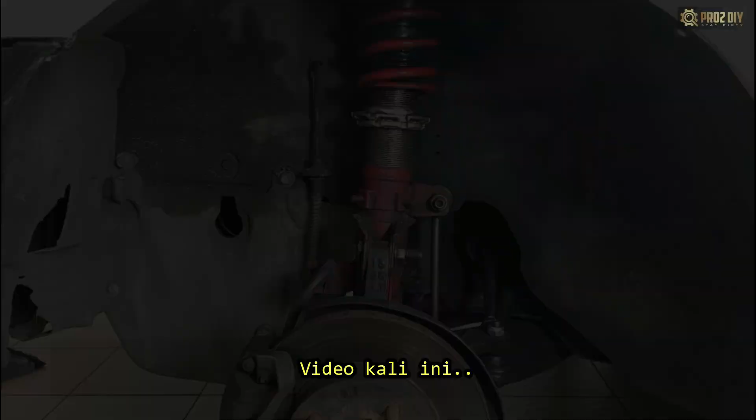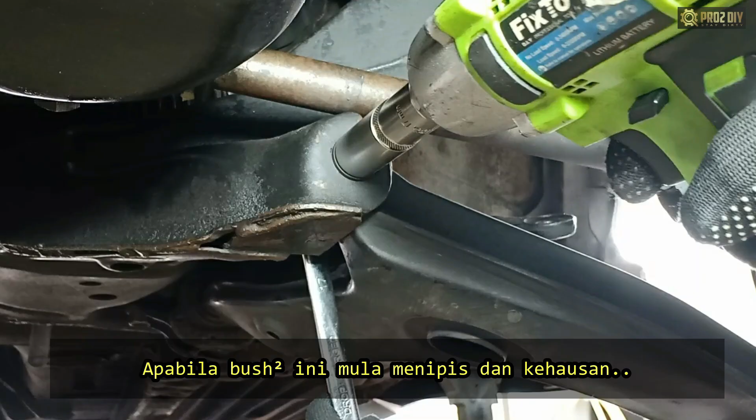In this video, I will share with you guys how to restore and rebuild the suspension system on your car. Almost every bushing on the front wheel is going to be replaced. The reason why we are doing this is because all these components are worn out and they have to be replaced. Once the bushings start to wear, it results in metal-to-metal contact, causing greater damage to these metal parts.

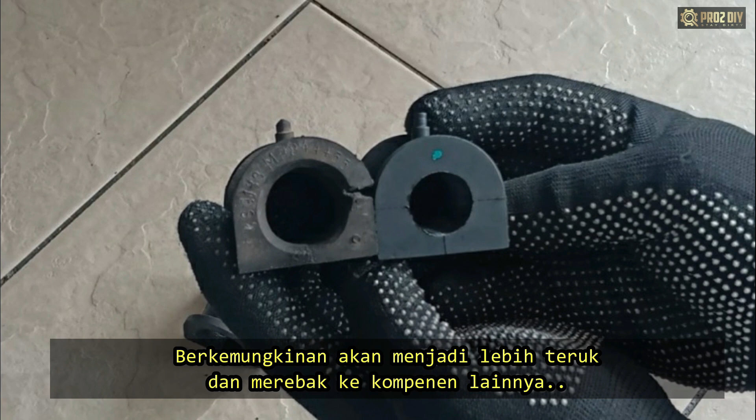Not only is this a relatively inexpensive repair, but replacing them will help ensure that your vehicle is safe to drive. Additionally, if you ignore the damage, there is a chance that it will get worse and lead to further damage. Remember, it's best to get the problem solved as early as possible, in order to avoid more serious conflicts in the future.

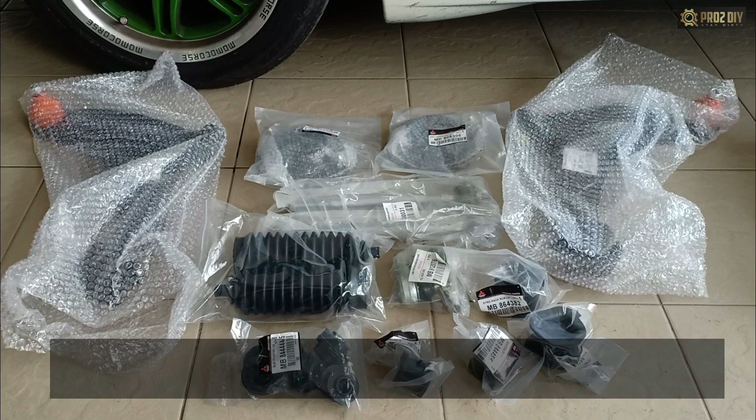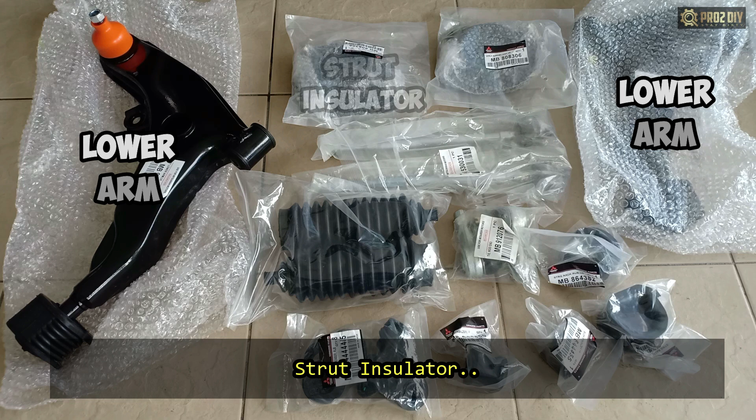To give you an idea of what we'll be doing, here are the old components that I have removed and will be replaced with the new ones. Generally, everything from the wheel inwards is gonna get replaced. Here are all the new components that will be installed on this car.

We will be replacing the lower arm, the strut insulator, also known as the absorber mounting, inner tie rod, and outer tie rod end, along with a new boot cover to protect them. A pair of rubber bushes for the steering rack. A set of cross-member bushings and a set of front stabilizer bushings.

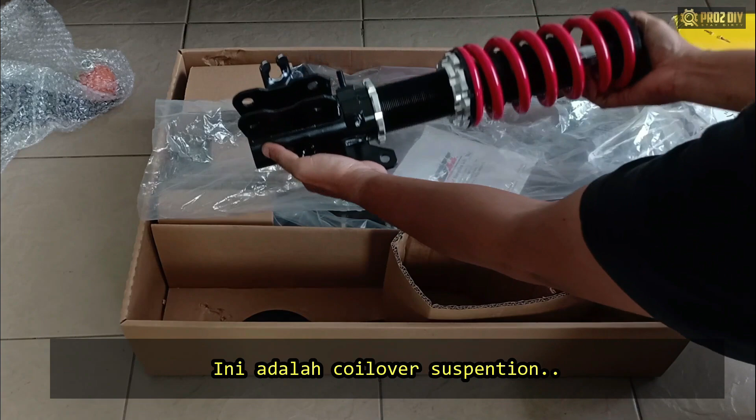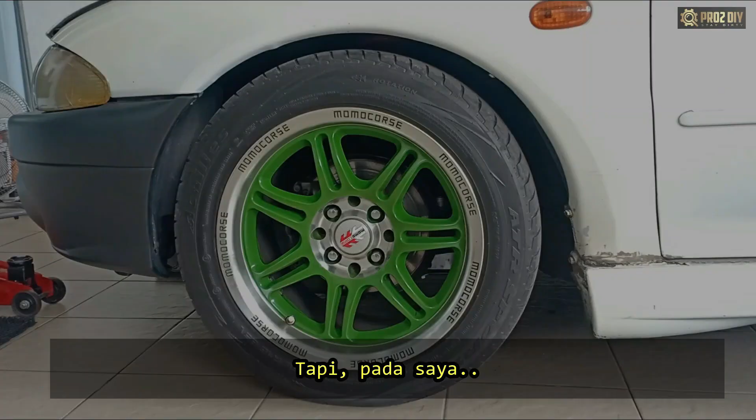I will also replace the suspension for this car with a new one. This is coilover suspension, a type of suspension that allows you to adjust a car's ride height. Some people call it a high-low body shift adjustable absorber. While coilovers are better known for their height adjusting capabilities, people usually think they make the ride less comfortable. However, if you install the coilovers properly, you'll actually get better handling.

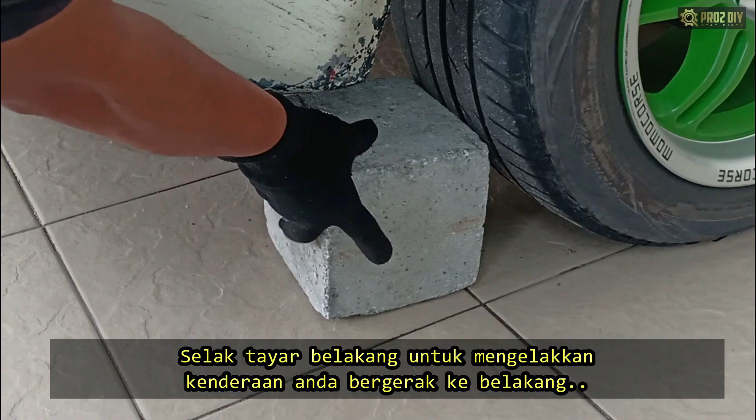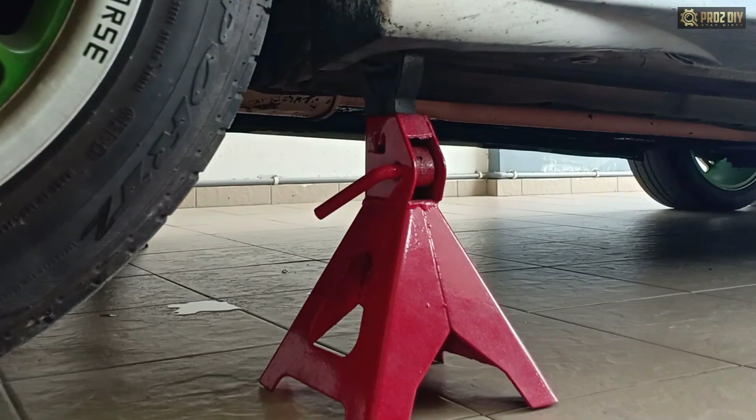So, we're ready to get started and install our new suspension. Before you jack the vehicle up, block off the rear tire so the car doesn't roll. And also pull the emergency brake, which will prevent the car from rolling. Use the hydraulic floor jack for the safest way to lift your vehicle. Slide the floor jack underneath your vehicle, right at your jacking points.

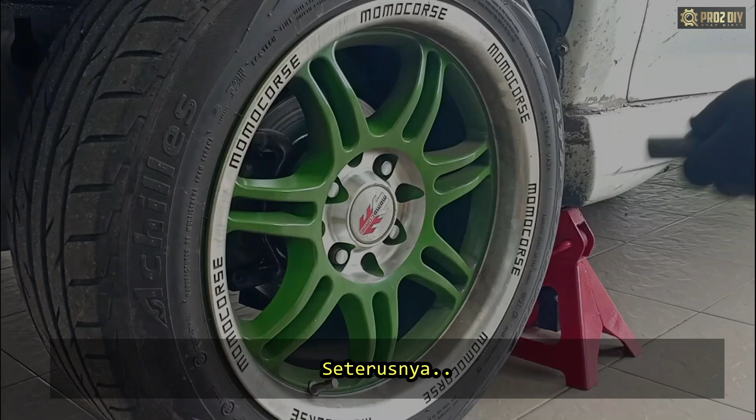Once the car is jacked up, you can get your jack stands and place them under the car. Then, you're going to slowly lower the car down onto the jack stands. Before you begin working under the car, wiggle the vehicle left and right to ensure it is stable and secure on the jack stands. Wiggling the vehicle also tells you whether you have the wheels blocked properly.

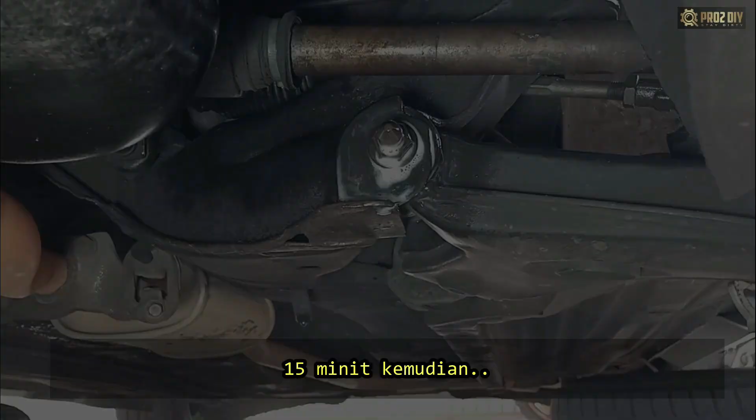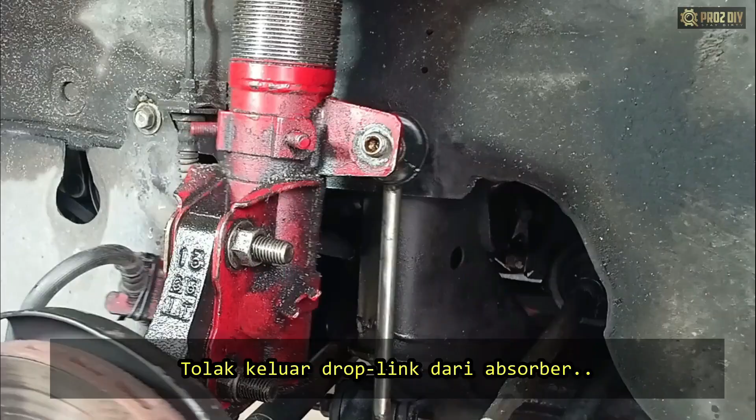Once you've done that, unscrew the lug nuts that hold the tire in place and take the tire off. For extra safety, place the tire under your vehicle. As the bolts and nuts will most likely be covered in rust under here, I will put some lubricant on them to try and help release them. You might find it best to leave them to soak for 10 to 15 minutes before starting.

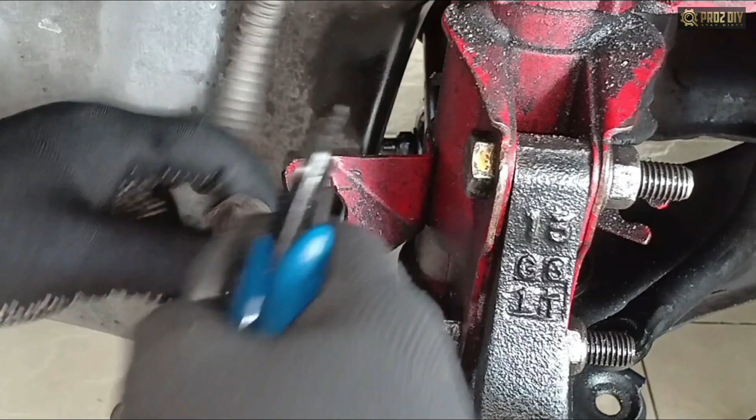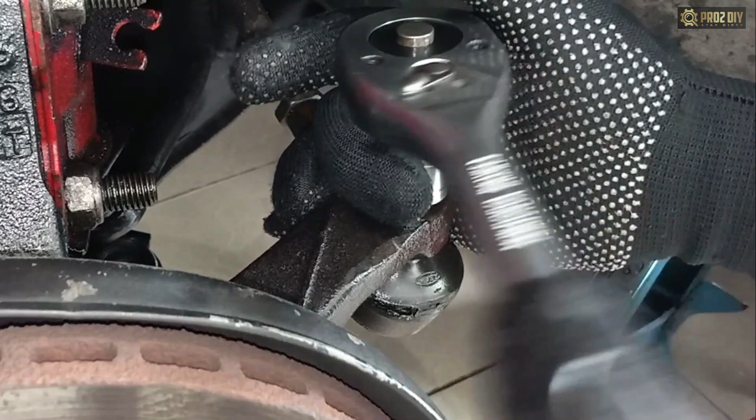After 15 minutes, start by removing the upper 17mm bolt from the drop link. Take a car jack, and jack up the knuckle to get the drop link aligned with the ARB hole. Push the drop link away from the absorber. Remove one more 14mm bolt, located below it. And then remove the drop link. Cut the cable tie to release the brake hose from the absorber.

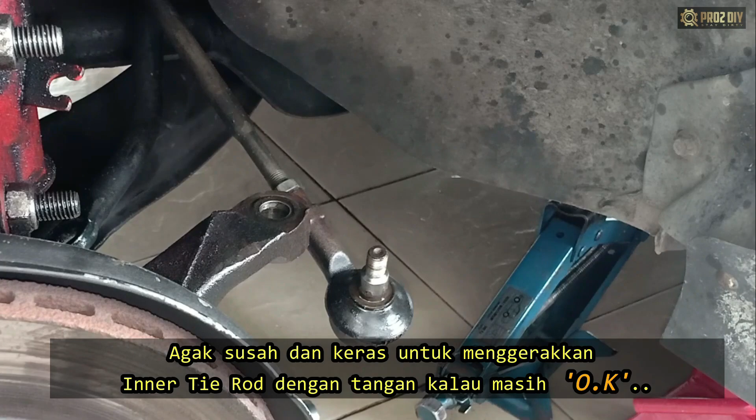Next, we will remove the tie rod end. Use a 17mm socket to loosen the nut above it. To remove the tie rod end, you can use a ball joint separator. Slide the fork of the separator between the ball joint and the part you want to separate it from, and position the top of the jaw at the center of the tip. Sometimes the tie rod end can get stuck to the knuckle. This special tool can help make it easier to separate them.

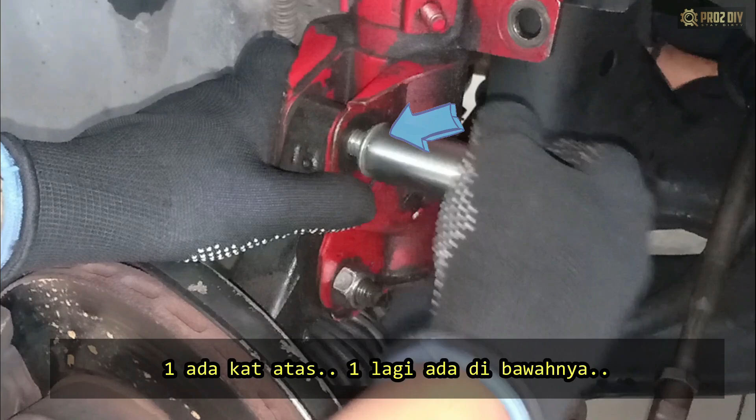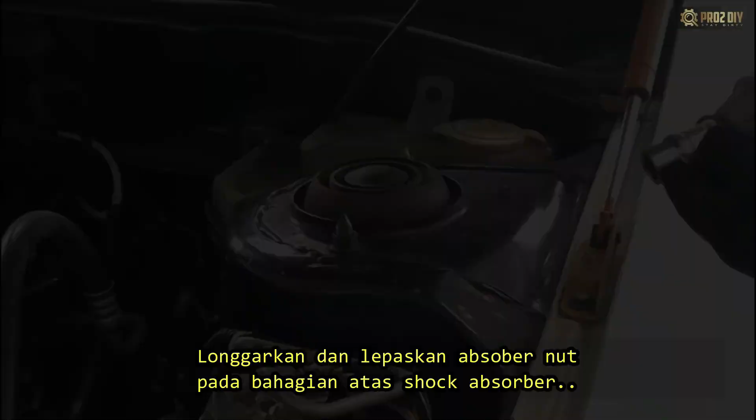Next, we are going to take out the shock absorber. First, we need to loosen the two bolts, one at the top and one at the bottom. Use a hammer to push them out from the shock clevis. Remove the upper bolt, then insert a screwdriver into the hole. This will hold the shock absorber in place for the moment. Then remove the lower bolt.

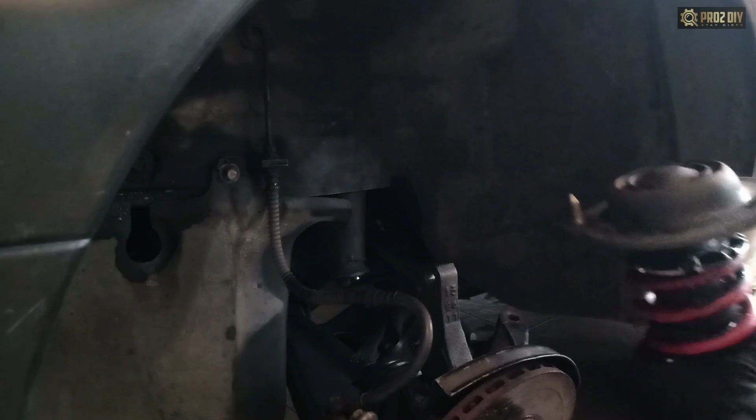Loosen and remove the top shock absorber nut. 14 millimeters. Remove the screwdriver. Pull outward the knuckle, and you can take the shock absorber completely off the car. This shock is having issues with oil leaking out. You can see that the shock looks wet and oily.

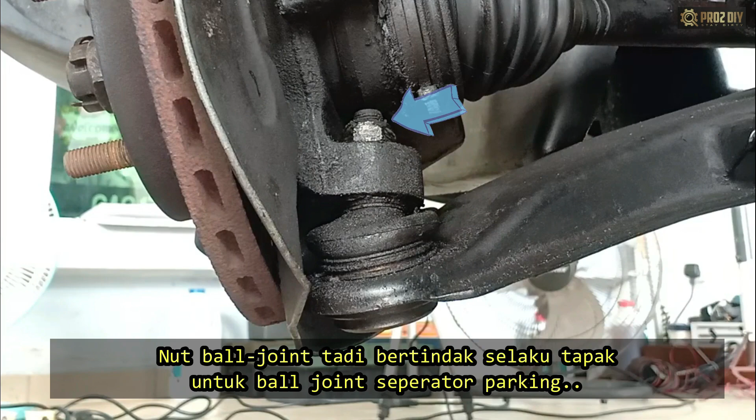Before we continue, I would hang my knuckles from the vehicle with a wire. Lift the knuckle using a scissor jack and insert the wire to hang the knuckle. This prevents the knuckle from putting pressure on the brake hose or the drive shaft.

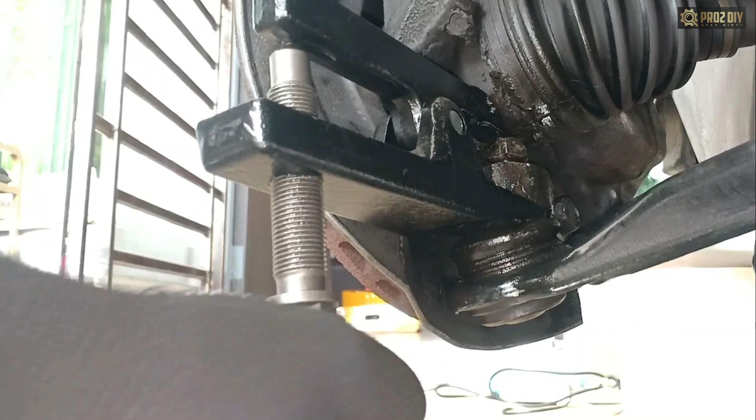Next, we are going to take out the lower arm. We need to turn the knuckle outward to create some room. Then, we will loosen the 19mm nut on the ball joint. Only loosen the nut, do not remove it from the ball joint. The nut protects the end of the thread when using the ball joint separator.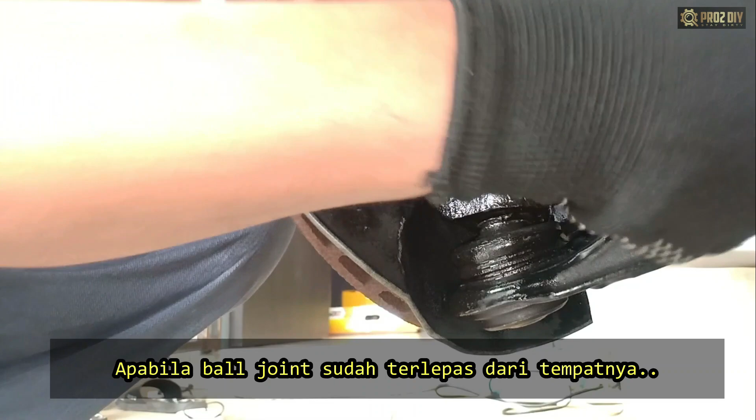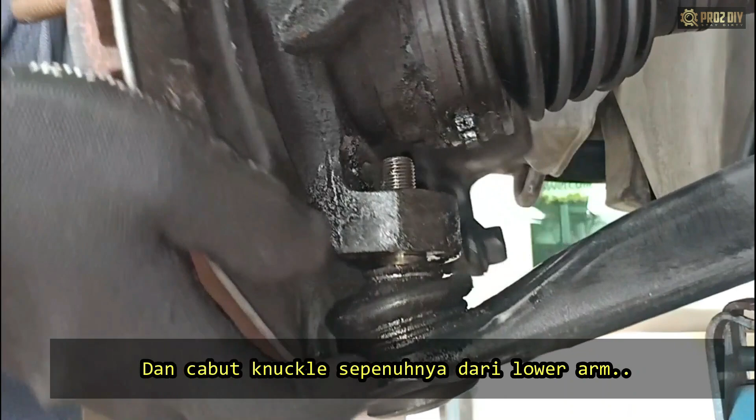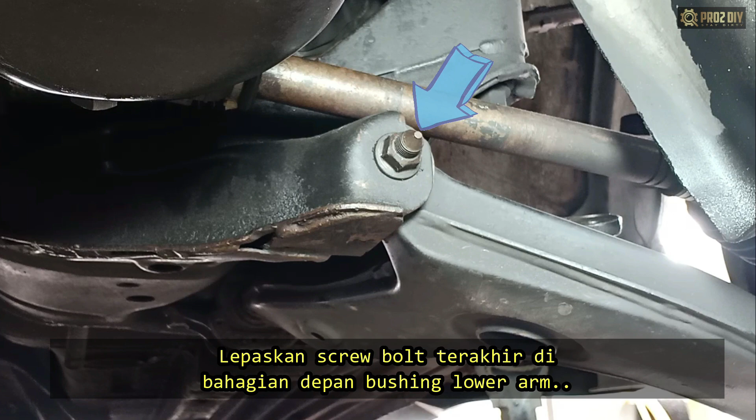Slide the fork of the separator between the ball joint and the knuckle. Using a 14mm socket, tighten the bolt of the ball joint separator until the ball joint breaks free. Or, you can use a hammer to hit the joint, which will make the ball joint come loose. Now with the ball joint broken loose, continue removing the 19mm nut. And remove the knuckle assembly from the lower arm.

It's obvious that the dust cover of the lower arm is broken. Moisture and dirt will enter the joint, resulting in premature wear. Clearly, when I push the ball joint with my hand, it can move easily.

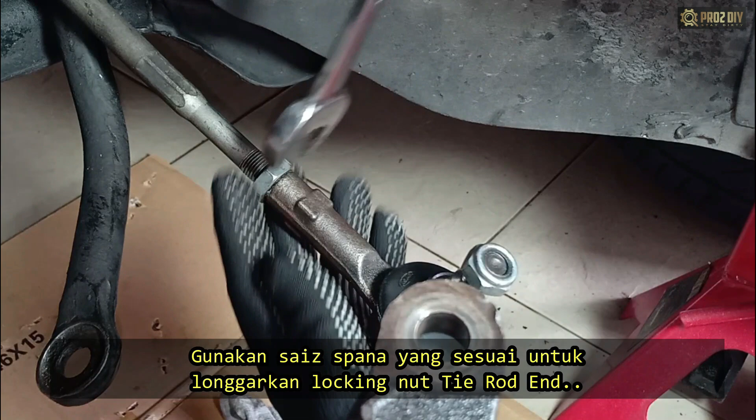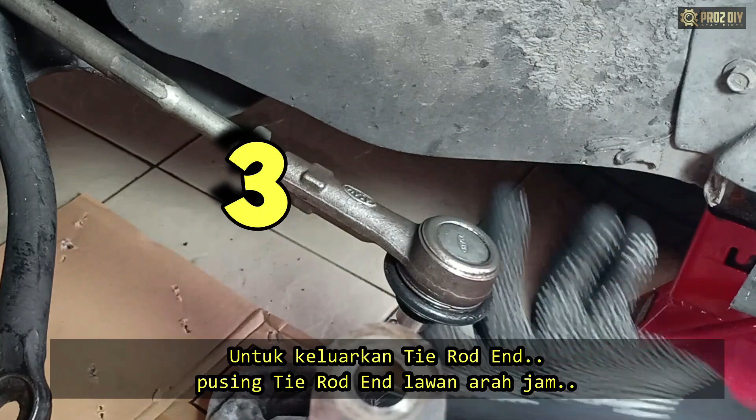Next, remove the lower arm support bracket by unscrewing the two screw bolts. 17mm. Remove the last screw bolt from the front bushing. Use a 17mm ratchet to hold one end of the screw bolt, and then unscrew the 17mm nut on the other side. Remove the screw bolts from the assembly, and the lower arm can be removed completely from the vehicle.

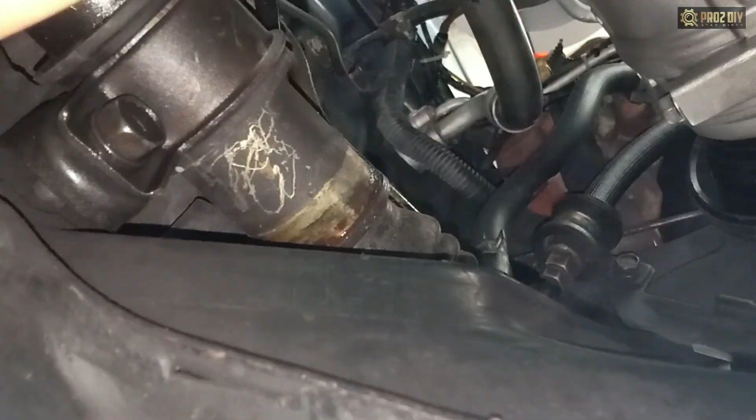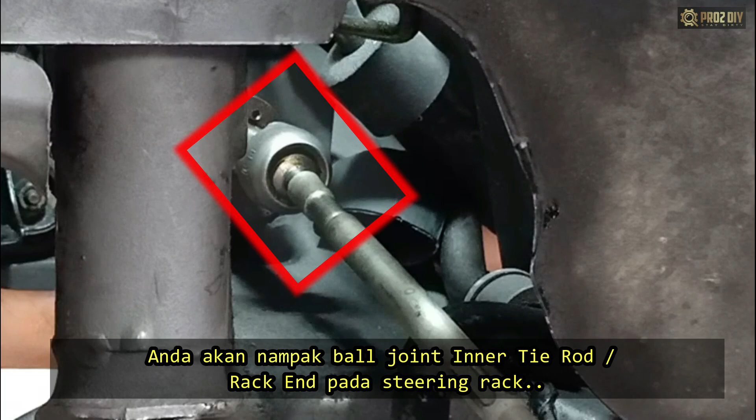The next item to be removed is the inner and outer tie rod end. There should be a locking nut sitting tight against the tie rod end. Use a properly sized ratchet to loosen the locking nut. Mine was 19mm. The outer tie rod end must be twisted off from the inner tie rod.

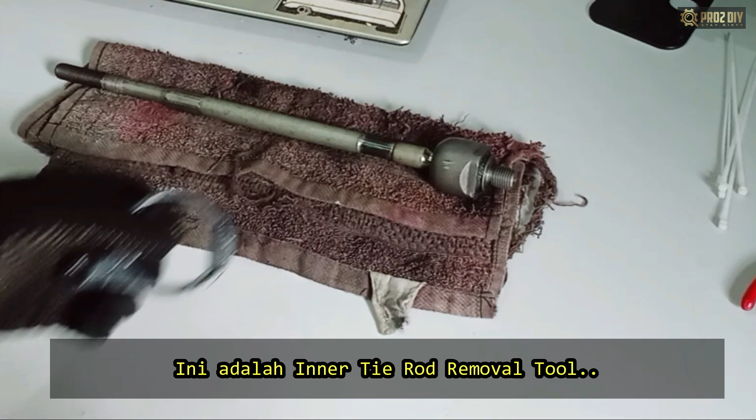Remember to count exactly how many turns it takes, so that you can tighten the replacement the same number of turns. This helps keep your alignment as close as possible. However, you will need to have an alignment done after replacing the inner and outer tie rod end.

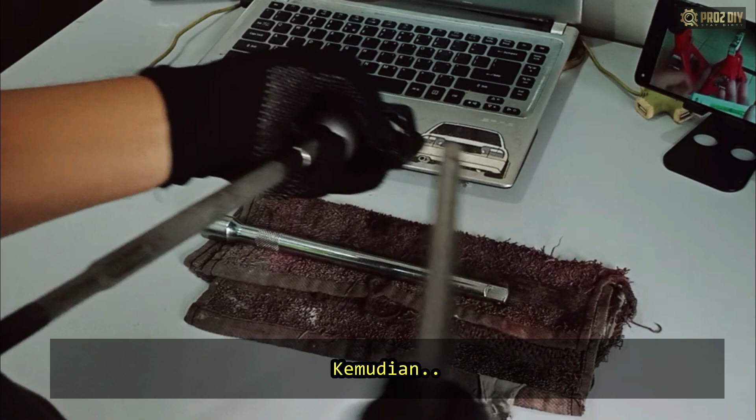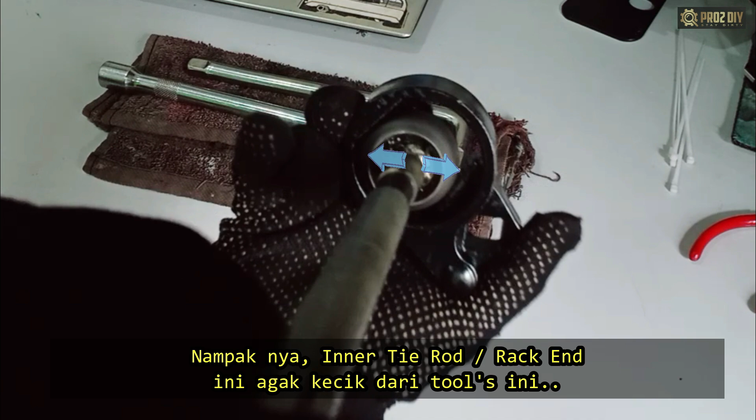Next, take a cutter and cut the cable tie from the boot on the inside end of the inner tie rod. There is another one at the very end of the boot that you need to remove. Now, you can slide the boot off. Once you remove the boot, you will be able to see the ball joint of the inner tie rod where it is screwed into the rack.

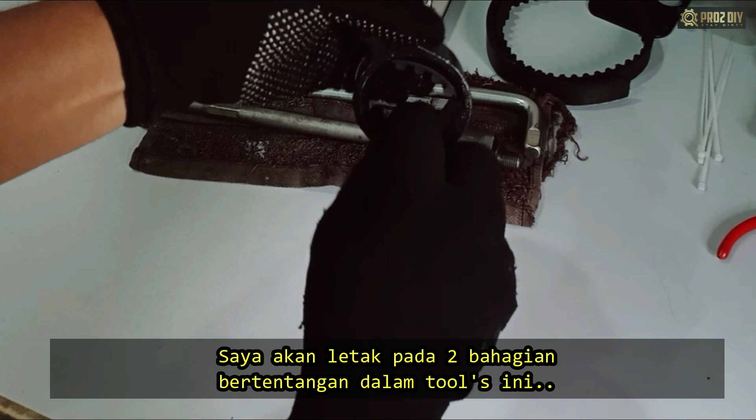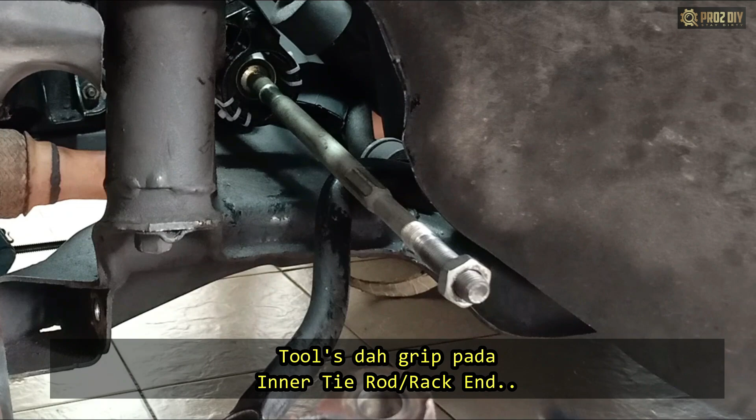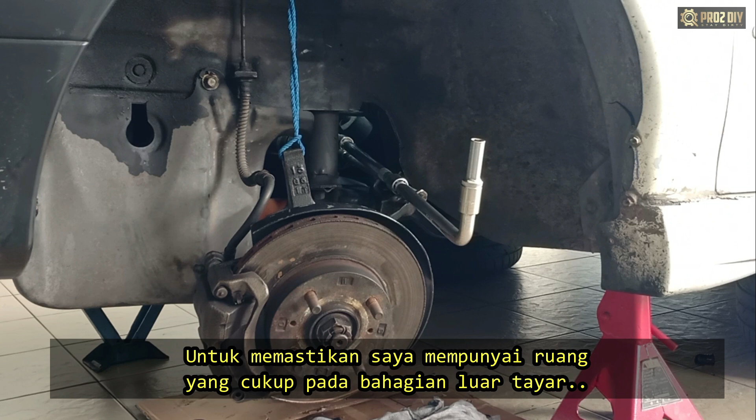To remove the inner tie rod, you will need a special tool. This is an inner tie rod removal tool. How to use it? You can just slide it over the end of the inner tie rod. The head was designed to auto-grip the end of the inner tie rod when it meets a flat surface on the inner tie rod. Then, put a long extension on there with a breaker bar. Twist it anti-clockwise, and it comes right off.

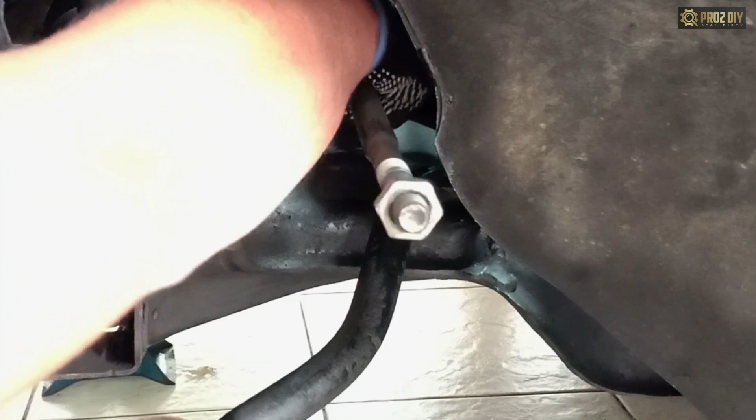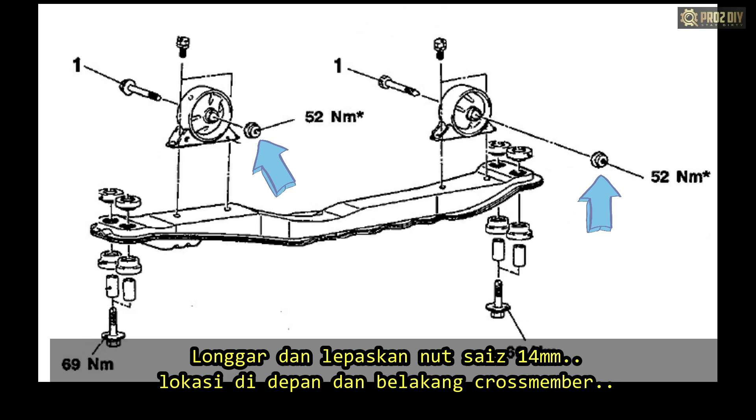But it seems the inner tie rods are smaller in diameter and the tool won't grip the tie rod very well. So, I made a few adjustments to it. Using my old timing belt, I cut 2 small pieces and placed them on opposite sides of the tool. Then, I use some cable ties to secure them.

Alright. Let's see how well these work. Begin by sliding the tool over the end of the inner tie rod. Give it a push left and right a couple of times. That will make sure it's firmly gripped around the end of the inner tie rod.

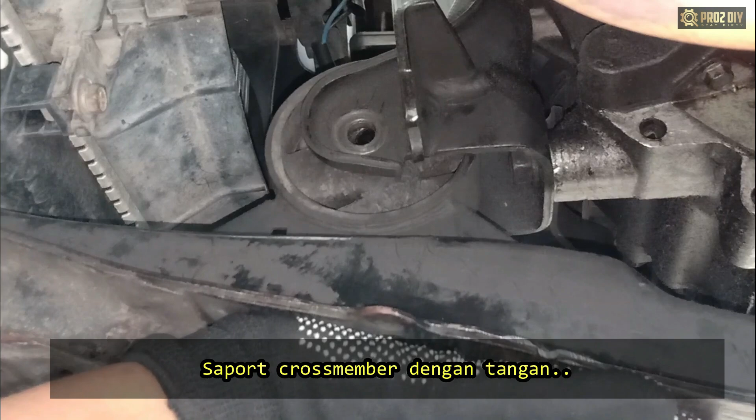Once that is secure, attach a long extension to the socket drive. I used 3 long extensions in a row, so I could have enough room outside the wheel well area. At the end of the extension, I used a long pipe to break the inner tie rod loose. Then, twist the inner tie rod end counterclockwise to loosen it from the rack. Once it is loose, you can take the rest off by hand.

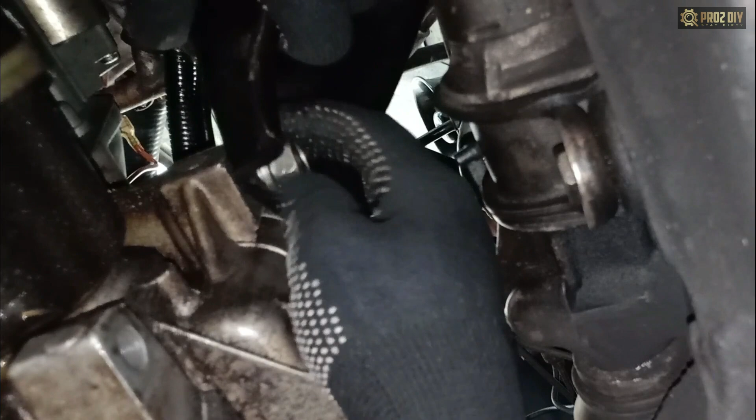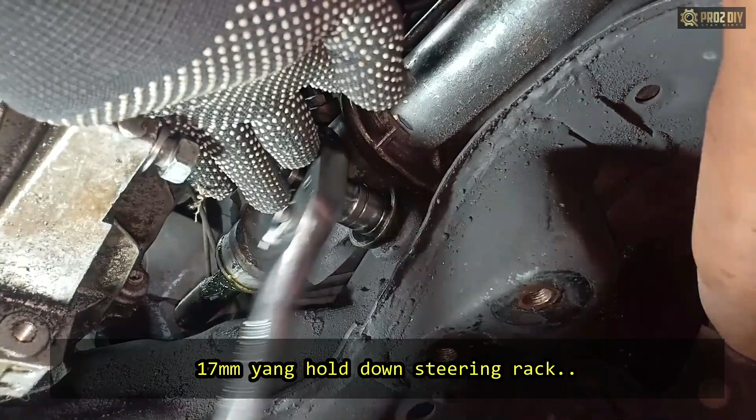The next part that needs to be removed is the cross member. Loosen the 2 nuts that are 14 mm in size located at the bottom of the front and rear cross member. Just remove the nut without taking out the screw bolt from the engine mounting. This will hold the cross member in its place temporarily. Remove the screw bolt that is holding the cross member in place. There are 2 screw bolts, 17 mm in the front, and 2 more in the back.

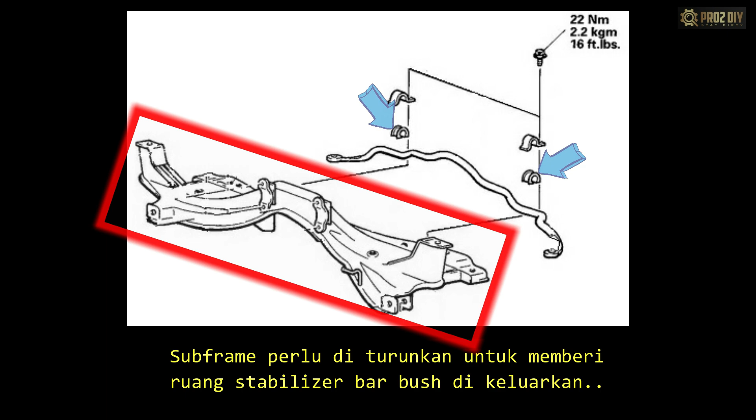Take out the engine mounting screw bolt at the back. And remove the screw bolt from the front. While supporting the cross member with hand, slowly bring it down.

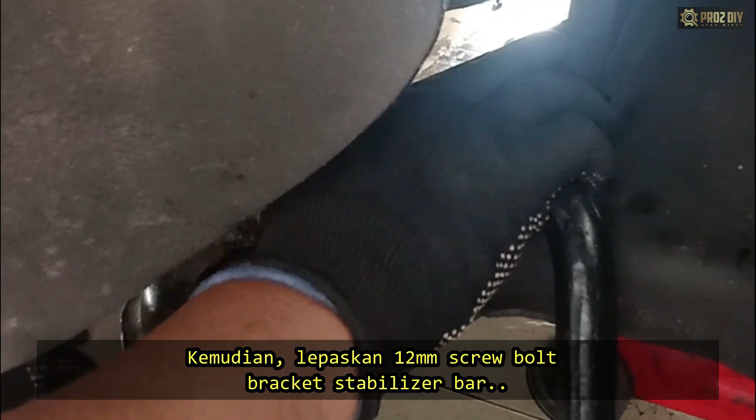The next item to be removed is the stabilizer bar bushing. Before removing the steering rack clamp, we need to take out this bracket first. Moving this bracket allows us to make space for loosening the steering rack clamp. Loosen the 12 mm screw bolt on the bottom of the bracket. And loosen the top screw bolt.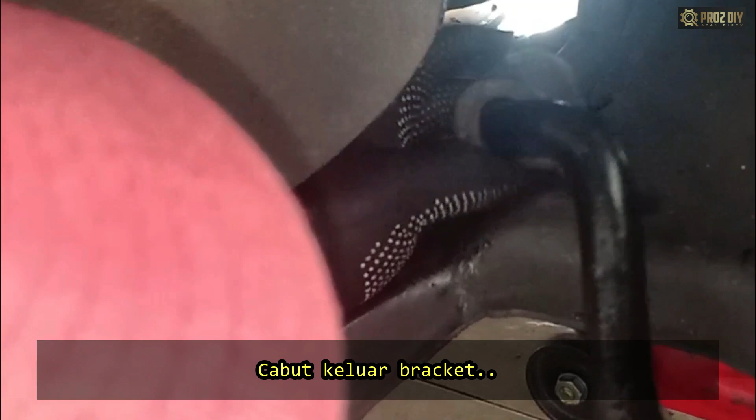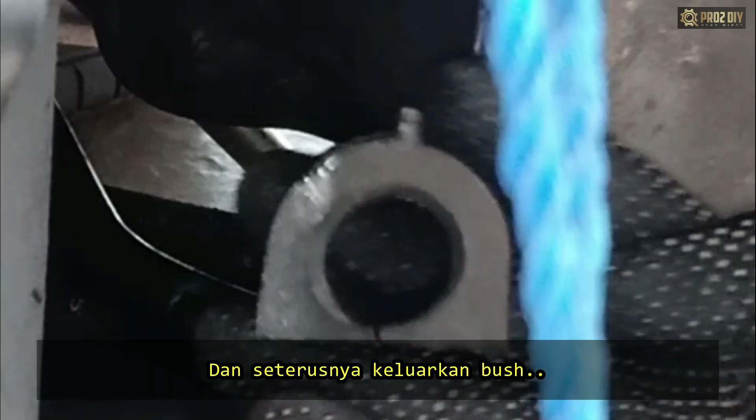Then, remove the bracket. And then, you can remove the 2 screw bolts, which are 17 mm in size, that hold the bushing to the steering rack. Then, remove the bracket. Move the steering rack forward to create some room, and then you can take out the worn-out bushings. Repeat the same steps on the other side of the steering rack.

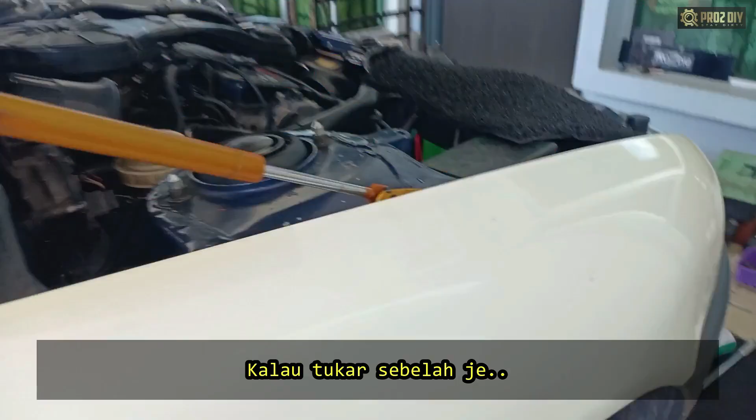Alright. The two steering rack bushes have been removed. The next part that will be removed is the stabilizer bar bush. To remove the bush, we need to lower the subframe so there is enough space to take out the bush. You need to unscrew the two 17mm screw bolts in order to lower the subframe. This is where the stabilizer bar bush is located.

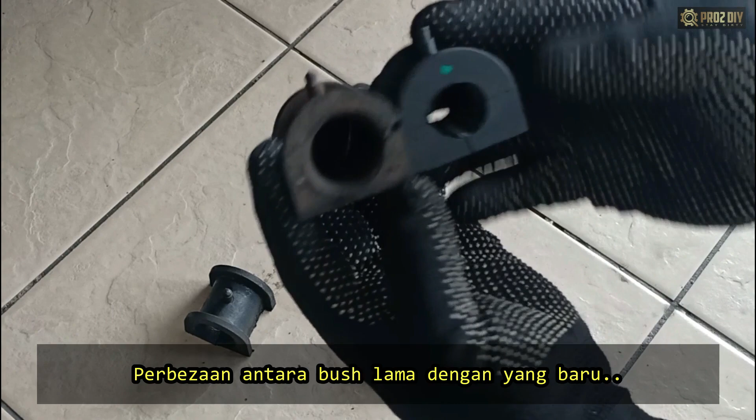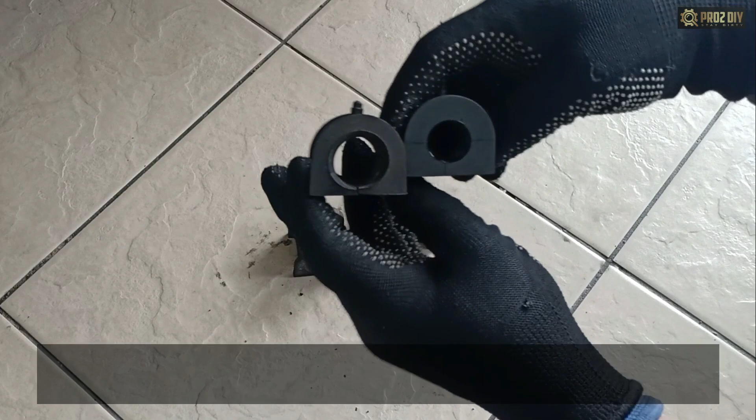Remove one more screw bolt from the driver's side. This will make enough space for us to remove the stabilizer bar bushing. Then remove the 12mm screw bolt from the bracket. Remove the bracket. Once the bracket is out, we can easily take out the bush.

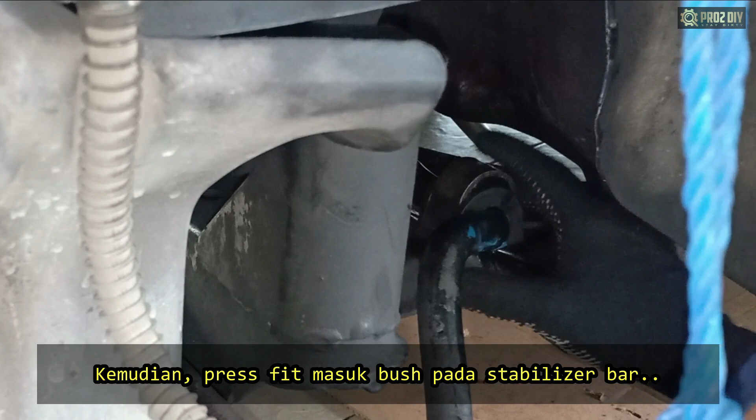The same process applies to the stabilizer bar bush on the passenger side. Remove the bracket and the stabilizer bar bush. Clean off any dirt or grime from the bushing mount area. It is important to make sure the mount is clean before installing a new bushing.

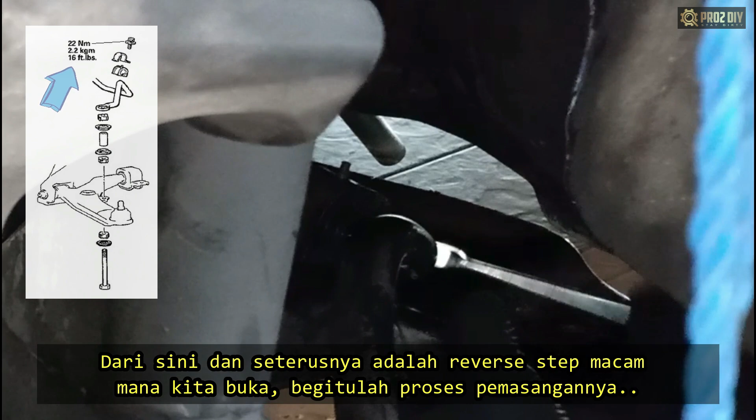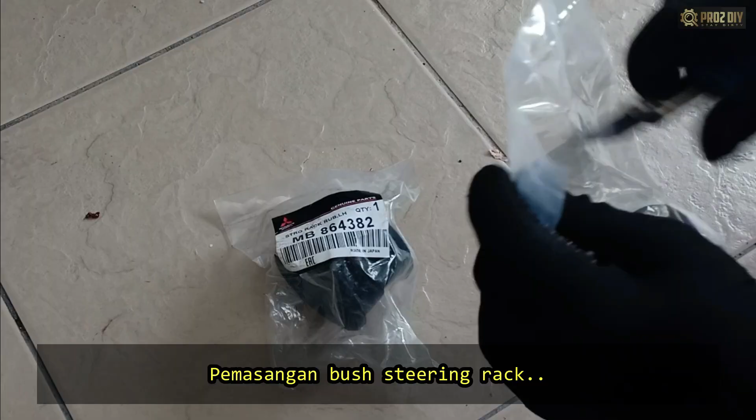Alright. We already removed all the parts that we needed to change. Remember that in a car suspension system, parts tend to be replaced in pairs. This is because when any suspension part, such as the lower arm, rack end, tie rod end, or any bushing fails, the other side is likely to follow soon. This means that the left and right parts would need to be replaced at the same time. If you replaced only one side, it would create imbalance. More stress would be exerted on the side that hasn't been replaced, and reduce its life expectancy.

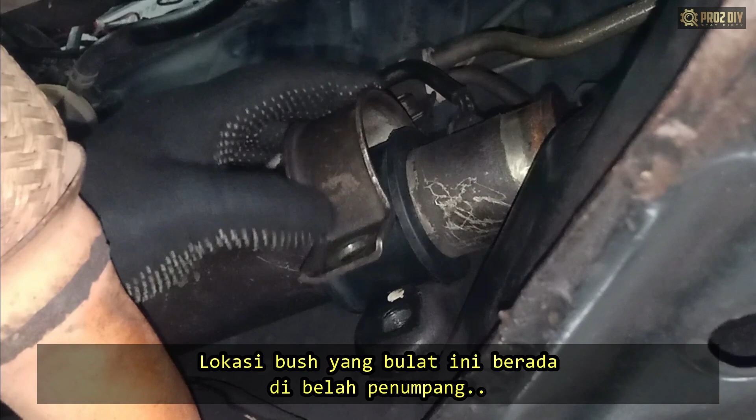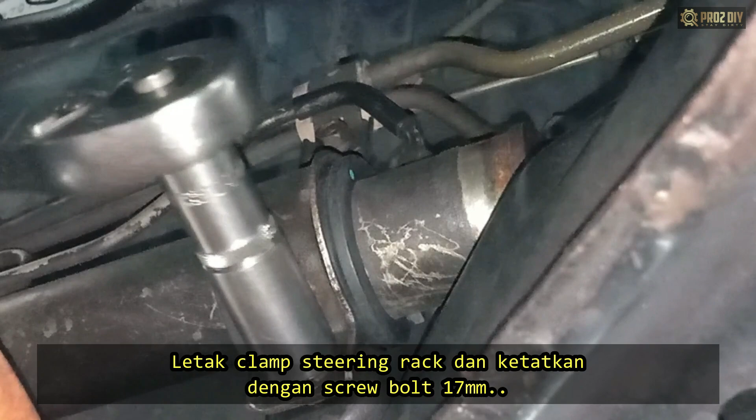Alright, everything is ready. Now it's time to assemble everything. First, we are going to install the stabilizer bar bushing. You can see the difference between these two. The old one has a wider hole. This can cause the stabilizer bar to rattle and make a clunking sound, especially when you drive around corners or over bumps. The new one looks nice and should fit snugly without any play or movement.

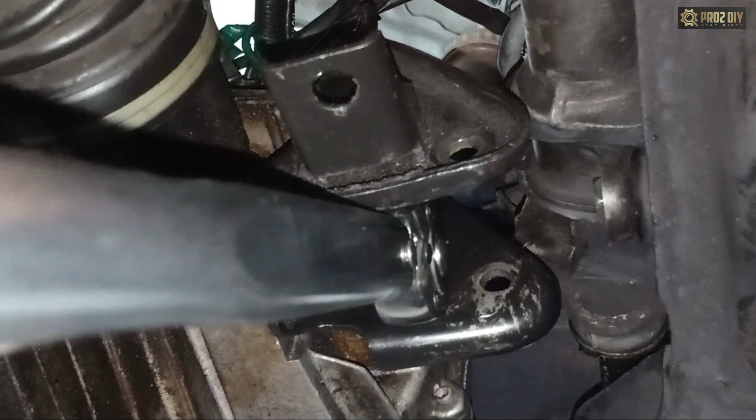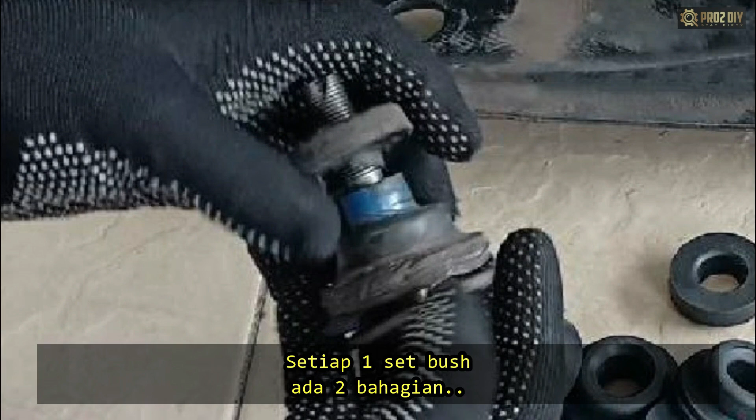Before you install it, it's a good idea to use rubber grease. This grease compound is designed to preserve rubber and help prevent it from deteriorating and cracking over time. Squeeze some grease inside both bushings. Then press fit it to the stabilizer bar. Put the steering rack clamp over the bushing and tighten the 17mm screw bolt on the clamp.

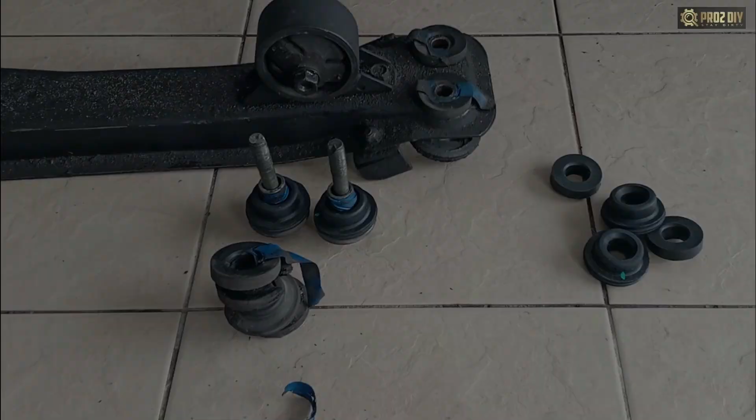From here on out, it's basically the reversal step of what we did before to remove the component. Use the floor jack to raise the subframe and then secure it with the screw bolt, 17mm. The right side and the left side.

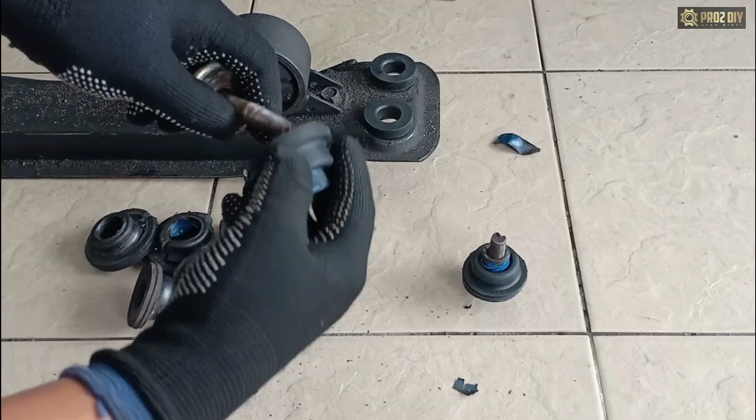Next, 4 new bushings will be installed on the cross member. Each bush has 2 parts, an upper and a lower part. And one set of bushes also has a metal cylinder cone in the middle. First, we need to remove the cylinder cone from the old bushing.